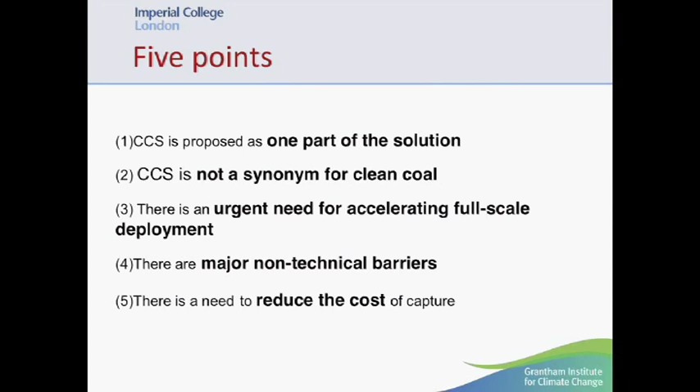The first point, which Martin made very well, was that CCS is only one part of the solution to mitigating climate change, alongside renewables, alongside nuclear, not in opposition to. Now, CCS is best applied to large point sources, and a coal-fired power plant is a very good example of a large point source. But there are other examples, including gas and biomass-fired power plants, but also in industry, industrial boilers used to raise heat for industrial processes.

If we agree on the fact that CCS is an important part of the solution to mitigating climate change, then the next thing we need to do is get around and do it and accelerate the full-scale deployment. There are no major technical barriers to doing this, but there are technical uncertainties, because we haven't yet demonstrated capture integrated with a full-scale power plant.

But the major uncertainties are associated with the cost, and this is to do with a lack of clarity in terms of policy and regulations. And finally, there is a need to reduce the cost. The capture is the most expensive part of the project. So there's a real need for sustained research effort in this area to reduce the cost of capture, which has significant economic implications over the lifetime of the project, which is likely to last 30 or 40 years.

So I'm going to breeze through this very quickly. This figure here shows the CO2 emissions associated with the combustion of conventional fossil fuels. The trend is associated with the spread of industrialization across the globe, and it's also sustained by trends towards modernization and electrification. And so most of these emissions are in fact associated with the electricity sector, the electricity system.

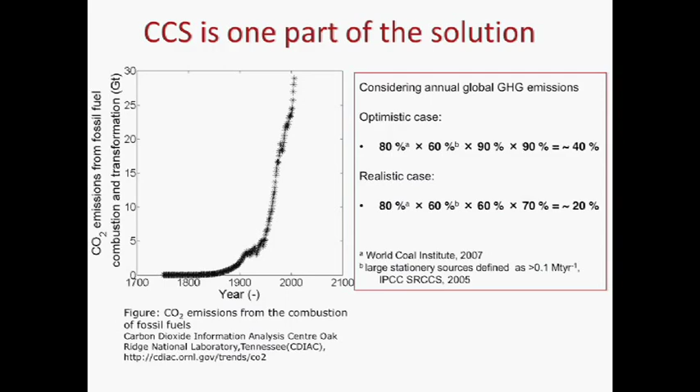And if we make a very optimistic assumption that we get 90% coverage, and that we're capturing and storing 90% of the emissions from these point sources, then we get to a reduction of about 40%. And of course, this is unrealistic. It's a big number, but it's an unrealistic number.

If we make more reasonable assumptions, and perhaps the coverage is closer to just over half, 60%, and we're not capturing all the emissions due to emissions associated with mining and the transport of the fuel, then the number's closer to 20%. And that's a big fraction, but it's clearly nowhere near enough of the reduction that's required to meet the 80% reductions that are being discussed around the world.

So I'm just hammering the same point, really, that CCS is only one part of the solution, but it is an important part of the solution.

So we've seen this image before. CCS can be applied in many different ways. At the centre here, the CO2 is being captured from coal, gas, biomass-fired plants, and industry. The CO2 needs to be purified, compressed, and then transported.

Martin talked about enhanced oil recovery, and this is a very mature industry at the moment. There are other reuse options which are being considered, including using CO2 to make plastics and fuels. But these reuse options are not part of helping mitigate climate change.

The demand is just not at the same scale as the amount of CO2 we're producing from these power plants, so most of the CO2, a significant fraction, needs to be stored. There are many different ways in which CCS can be applied, and depending on the application, the mitigation potential is quite different. Life cycle thinking is important to assess this.

A coal-to-liquids process with CCS fitted is still going to release CO2 into the atmosphere. However, at the other end of the spectrum, there's an example where CCS can be integrated with bioenergy systems and effectively remove CO2 from the atmosphere. This is perhaps one of the more practicable examples of an air capture system, certainly more so than direct air capture systems.

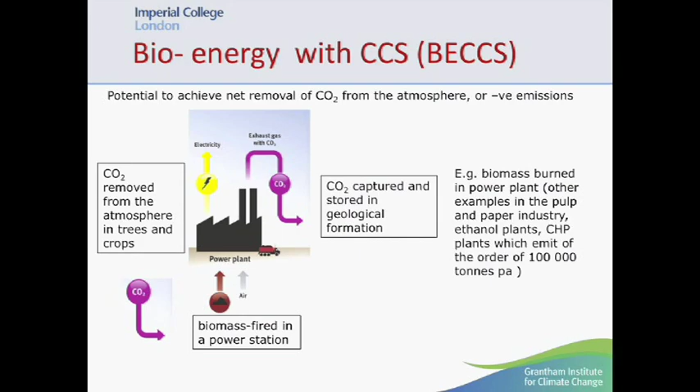It's always going to be cheaper and more efficient to use CCS coupled with a biomass-fired power station. The advantage of these types of technologies is that they can potentially be used to offset emissions in different sectors which are hard to reach, but it can also be seen as a tool to regulate the rate of mitigation. Of course, there are limitations related to the sustainable production of the biomass and its transportation.

Another application of CCS is in industry. Industrial emissions represent a significant fraction, about a third of total CO2 emissions. Some of these emissions are hard to get at, if not impossible, without fundamentally redesigning the industrial process. Cement is a primary example — it represents about a quarter of the total emissions.

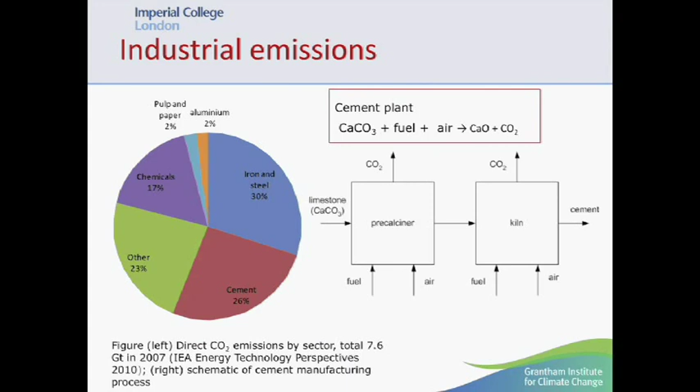The chemistry behind cement manufacture means we're limited in the extent to which we can mitigate these emissions by measures such as energy efficiency or fuel substitution. That's because the first step in the process is the decomposition of limestone, which is calcium carbonate, and that gives off about 50% of the emissions.

These emissions can be managed by integrating the process with cement manufacture, and in fact there's a unique synergy between the cement manufacturing process and calcium looping, which is a capture technology I'm involved in investigating in the department. There are posters outside if you want to learn more about that.

But the next part of the presentation, I'm just going to give a bit of an overview of the different capture technologies. There are three main categories: post-combustion, pre-combustion, and oxy-fired combustion. Some of the more advanced capture technologies borrow elements from these different categories. But at the core of all these processes is gas separation.

For post-combustion, it's the separation of CO2 from nitrogen. For pre-combustion, it's the separation of CO2 primarily from hydrogen. And for oxy-fired combustion, it's the separation of oxygen from nitrogen. What these processes have in common is that they use energy. So if you're integrating this with an industrial process or a power plant, there's going to be a parasitic energy demand, and that's a real driver for research in this field.

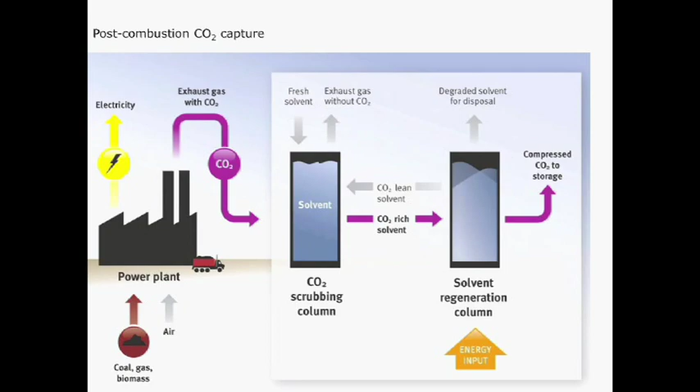To get this heat, some of the steam from the power plant steam cycle is diverted — steam that would otherwise be used for generating electricity. So this is where there's the major parasitic energy demand.

While this technology is mature in the oil and gas industry, there are some challenges and drawbacks in applying it to the power sector. The first is there's a significant scale-up required because of the huge volumes of flue gas we'll be dealing with. The second is the energy penalty, and another issue is there are other components in the flue gas, including oxygen and sulfur, which degrade the solvent. So there's a lot of ongoing work looking at these challenges.

The next category, pre-combustion capture. This category integrates the fuel conversion with the CO2 capture, and it's based on a technology known as gasification. With gasification, the fundamental process involves heating up a fuel, typically at pressure, but in the absence of sufficient oxygen to completely burn the fuel. What results is a mixture of combustible gases known as a synthesis gas, which includes the CO2. And the CO2 is separated from this synthesis gas.

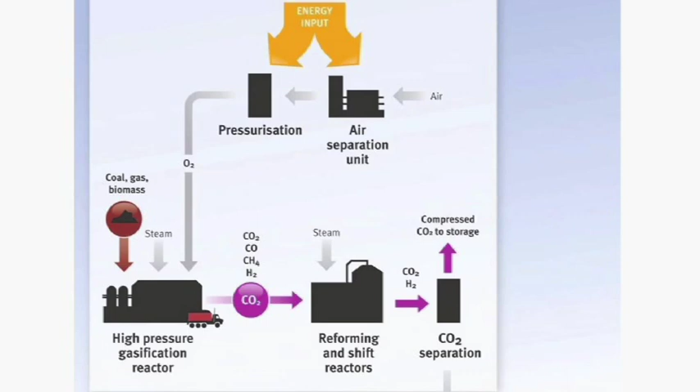The synthesis gas can then be fired in a turbine to make electricity, or further refining can occur to produce hydrogen that may be used in future fuel cells. But the CO2 is in a different form, and so different solvents are used in this case, physical solvents that don't bond quite as strongly with the CO2, so there's less of an energy penalty associated with the separation. Here there's a major energy penalty associated with pressurization of the process.

Again, the gasification process is a mature technology in the form of integrated gasification combined cycle plants. There are examples of these around the world, and the capture technology is mature in the chemicals industry, but there isn't yet an example of this integration. That said, this technology is perhaps going to be the first example of the full-scale integration of CCS with power, and there's a plant under construction in the US with plans for operation in 2014.

So the final technology category is oxyfuel combustion. The first thing that happens here is that oxygen is separated from nitrogen in air, and this typically uses a cryogenic process, which is an extremely energetic process. The advantage of burning fuel in oxygen instead of air is that the combustion exhaust is extremely concentrated in CO2 because it's not diluted by the nitrogen in the air. So it mainly contains CO2 and water vapor, which can be easily condensed out.

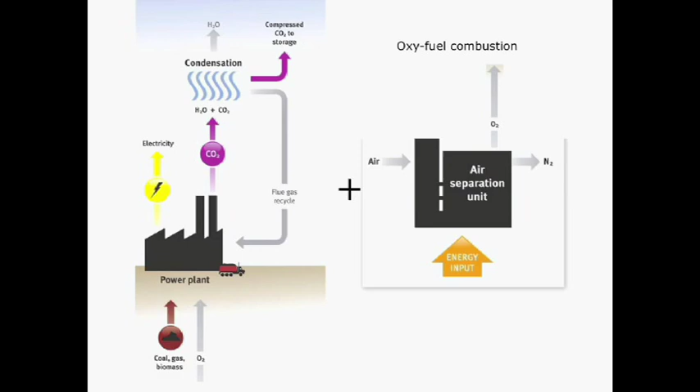This technology is also suitable for retrofit, which is an advantage. Compared to the other categories, it's perhaps a little bit further behind in terms of technology maturity, but there are some large pilot demonstrations around the world. Perhaps the largest is under construction in Australia.

So throughout this description of the technologies, I've stressed the energy penalty. This slide compares them alongside, but it's presented in terms of the overall process thermal efficiency. If we take as a reference a state-of-the-art steam cycle, these are about 45% efficient, meaning the conversion of the heat energy from the combustion of the fuel to electricity is 45% efficient.

Taking post-combustion as an example, if we retrofit a post-combustion plant onto this steam cycle, the overall process has a thermal efficiency of about 35%. That equates to a reduction in the power output of 20%. Another way of looking at it is we need to burn 20% more fuel to achieve the same amount of electricity. The other categories compare quite favourably alongside post-combustion capture. There are trade-offs across the different technologies, which I won't discuss today.

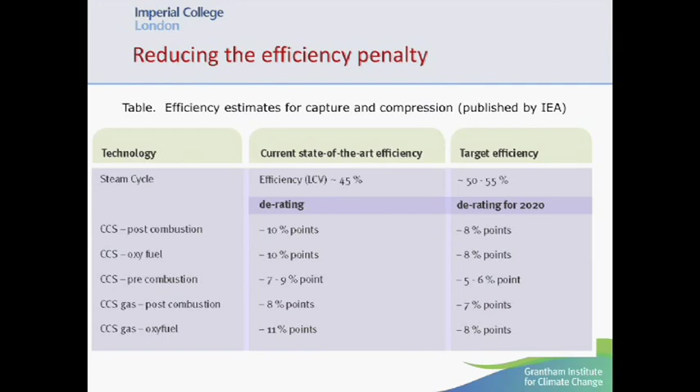The numbers on the right look at future projections, and some alternate future projections are shown here. This shows the likely technology adoption trajectory. Technologies further down the track are characterised by the potential to significantly reduce the efficiency penalty, but also by greater complexity. So the first round of CCS plants are likely to use amine-based solvents and integrated gasification combined cycle plants with physical solvents.

But then in the next round, more advanced solid capture systems such as calcium looping are likely to come online, and this is the field that I work in. To give you an example, calcium looping technology, which uses high temperature sorbents, is currently being tested in a 1 megawatt scale pilot plant, perhaps about a hundredth of the scale of a small power plant, but realistically 5 years off, whereas some of the further future technologies are still at the laboratory scale, and there are many challenges to be overcome. Sustained research is certainly required.

So this takes us back to where we are today, and quite recently the Global Carbon Capture and Storage Institute did a bit of a stock take of all the carbon capture and storage projects going on around the world, and there's about 240 projects at various stages of development. However, a subset of these projects are what they define as large-scale integrated projects. And the criteria is given here, and of these large-scale integrated projects, there's about 80 at various stages of development. There are only 8 which are operational.

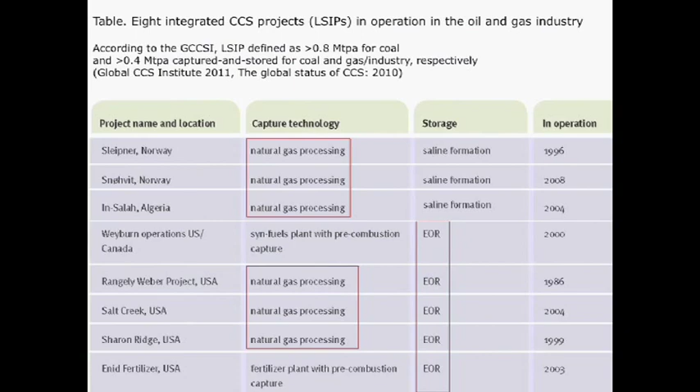And these are what are shown here in this table. And all I wish to point out is that pretty much all of these projects are in some way related to the oil and gas sector. So the capture technology is dominated by the separation of CO2 from natural gas, which is more straightforward than doing it from the exhaust of a power plant. And then most of the CO2 that's been captured is used for enhanced oil recovery. And there are plain economic reasons for this distribution.

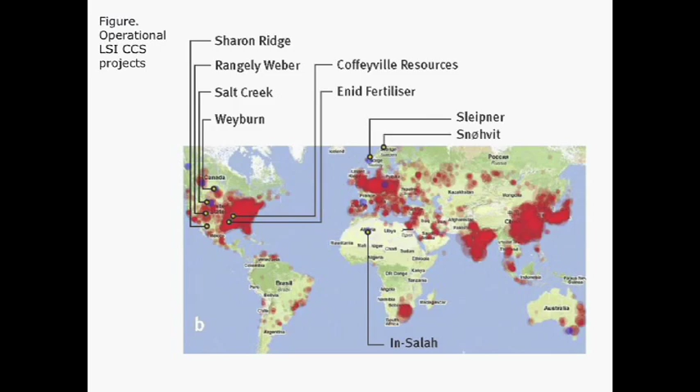Another distribution bias is in terms of the geography, and so a lot of these plants are located in North America. And while a lot of governments around the world, in Europe, including the UK and Norway particularly, are committing funds to this demonstration phase, the strategies in America are slightly more advanced, and a lot of the funds have been allocated to specific projects. And another reason for the distribution is also the maturity of the enhanced oil recovery market.

So looking very quickly at the UK context, the government is certainly making big commitments to be a world leader in terms of reducing greenhouse gas emissions, including, as an example, the commitments this week to reduce emissions by 50% by the mid-20s. And at the core of this is investment required in new nuclear plants and renewable energy, but also CCS.

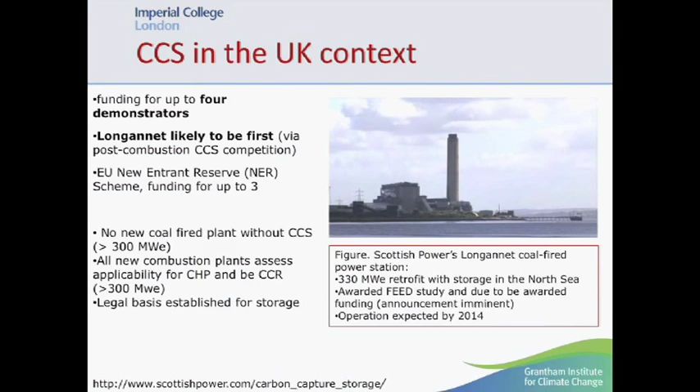So the role of CCS, well, the policy specific to CCS, there's a commitment for funding for up to 4 demonstrators. And the first project, Scottish Power's Longannet power plant, has almost been allocated funds, and this is a post-combustion capture demo on 330 megawatts. And as Jeff mentioned earlier, there are other avenues for funding in the UK for these demonstration projects through the European Commission.

The sum total of 4 demonstration projects of the scale of a few hundred megawatts is quite a way off where we perhaps need to be, of the order of tens of gigawatts, to meet the emission reductions. And so there's a lot of policy development work required, and this is ongoing. DECC's about to release a UK CCS roadmap, and there's ongoing consultations in terms of electricity market reform, which is at a critical phase at the moment.

So there is a lot of optimism that CCS can enable us to achieve significant emission reductions in the context of continued use of fossil fuels, but there does remain uncertainty in terms of the technology that's yet to be demonstrated in the power sector, and also uncertainty in terms of how we're going to pay for it, given the time constraints. But what I think we can be certain of is that this demonstration phase that we're at the beginning of, that's going to last at least a decade, is critical, and all eyes are going to be on these demonstrator projects. So I'll finish it there.